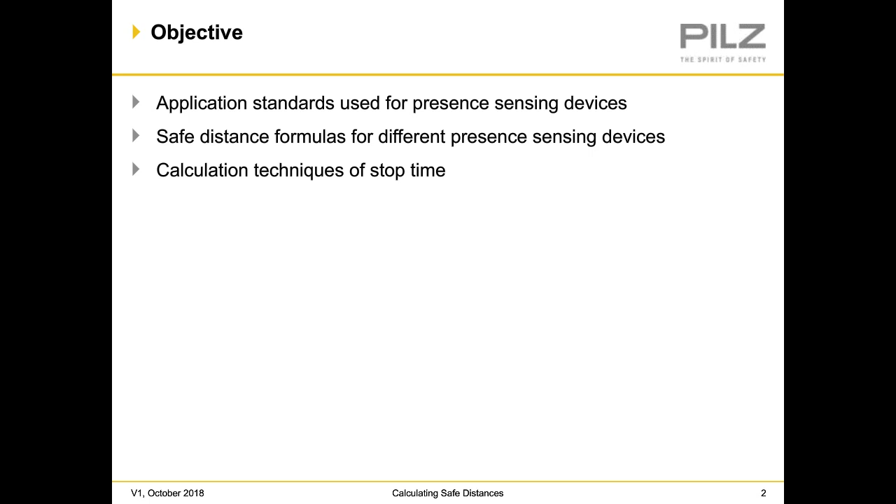The two main standards that we typically use for looking at stop time analysis are ANSI B11.19 or ISO 13855. Today we're going to primarily focus on 13855, and within 13855 you can use different types of technology such as light curtains, laser scanners, safety floor mats, two-hand controls, or even safe vision systems.

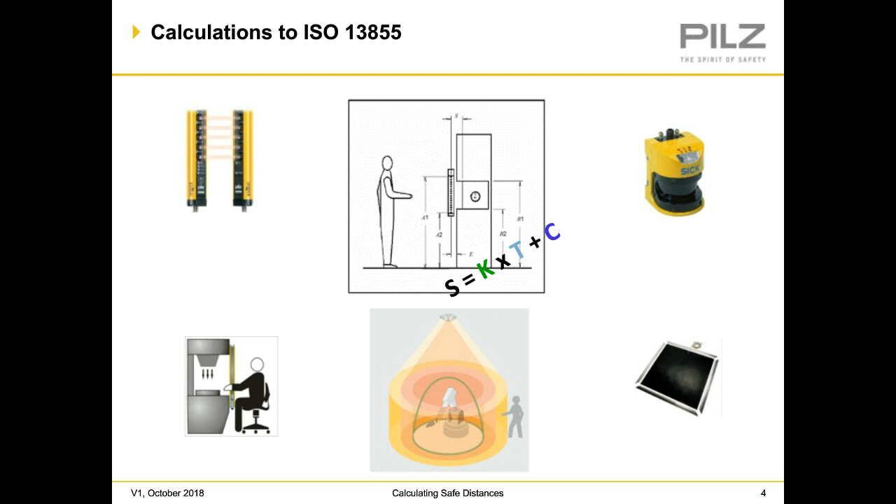A few of the applicable standards that we look at are 13855, positioning of safeguards with respect to the approach speeds of the human body. We also have 13857, safety distances to prevent danger zones being reached by upper and lower limbs. Those can also be applied. We have IEC TS 62046, application of protective equipment to detect the presence sensing of persons. It typically is used for the design of the presence sensing device. Then we also have ANSI B11.19, performance criteria for safeguarding.

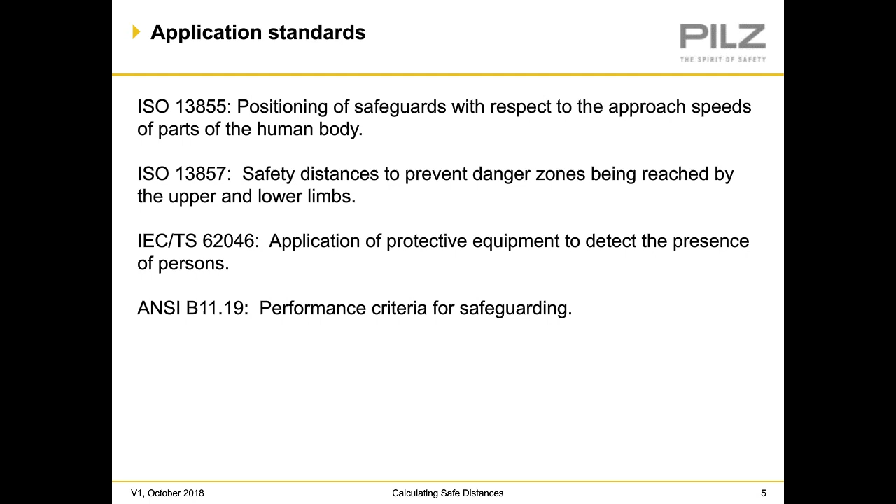Or you might even see AOPDDR, Active Optoelectronic Protective Device responsive to diffuse reflection. In other words, the reflection of light while being used in a laser scanner in 2 dimensions.

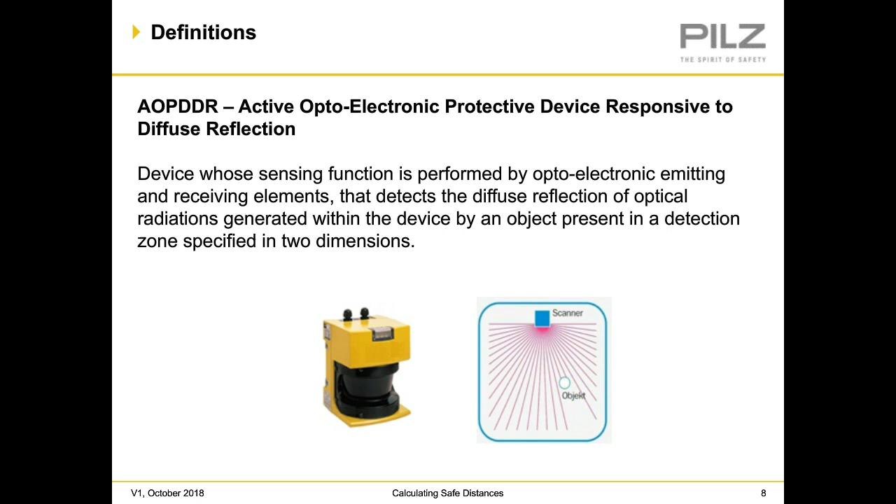Most of the light curtains and safety scanners nowadays do have what are called OSSD outputs, which are solid state. They are used with the machine control. They are typically transistors on the output, very similar to a normally closed contact, if you were to relate it to a dry contact.

When it comes to light curtains, we have different types of applications we can apply light curtains to. So here we have what's called blanking. With a specific type of light curtain that allows blanking, you can either have a fixed number of beams that are blanked in a specific location, or the blanking can also be floating, where you have maybe two beams that are blanked and it just floats up and down the light curtain throughout the application.

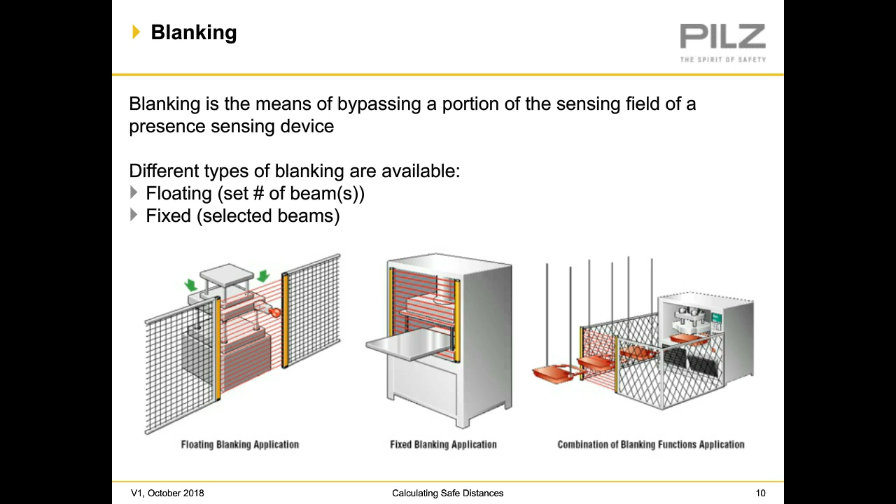We also have light curtains that allow for muting applications, for materials to flow in and out of work cells without having to disrupt the workflow through an interlock guard. In this case, the material is able to pass through the light curtain following a sequence of sensors that disable the light curtain to allow the material to pass through, but the safety function of the light curtain is still active.

So the typical application for this is either through an X pattern, as you can see in the top left, or if you look at the bottom right corner, there is a 4-sensor type setup that can also be used.

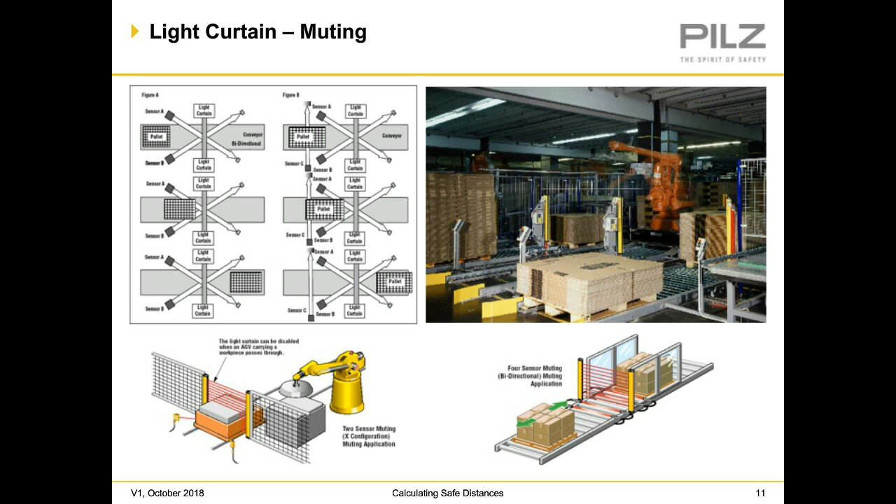There's also proper examples of light curtains or optoelectronic devices that can be used in safety applications. In this example, we see a standard light beam being used as a protective device to stop this roller. In this case, this is not an approved sensor to be used for a safety function.

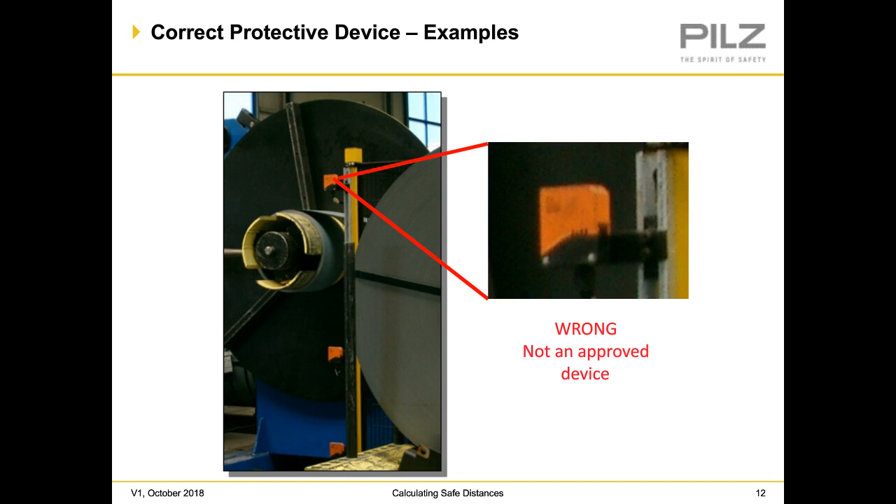We also have to deal with the proper installation of our safety-rated devices. We shouldn't have the ability to reach behind, around, over, or even crawl underneath it. So proper mounting is definitely required.

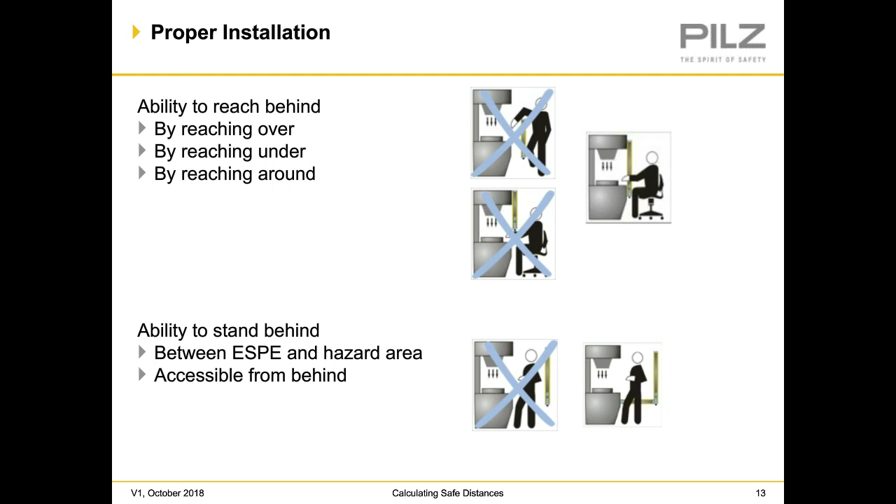So here we also have to worry about our proper installation as we were discussing. In this case, you may be able to reach around the light curtain into the cell, but we also need to maintain what we call a safe distance. So if the light curtain may be too close, we may have to move it away from the cell.

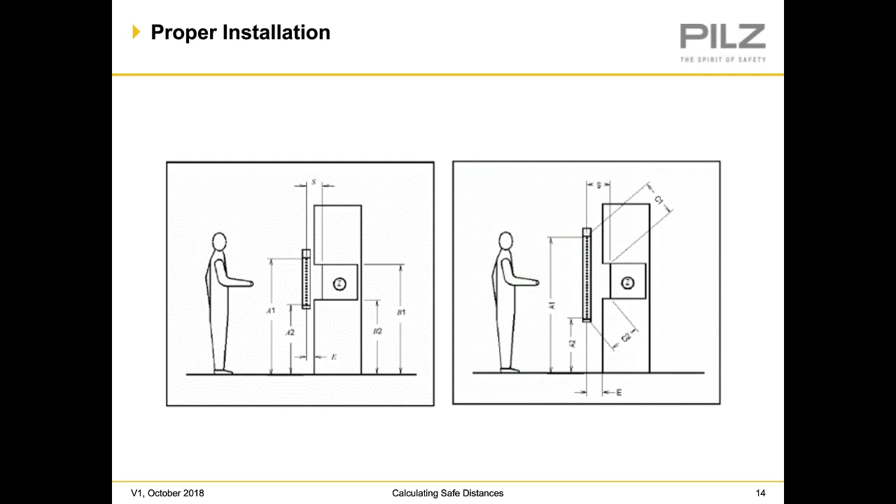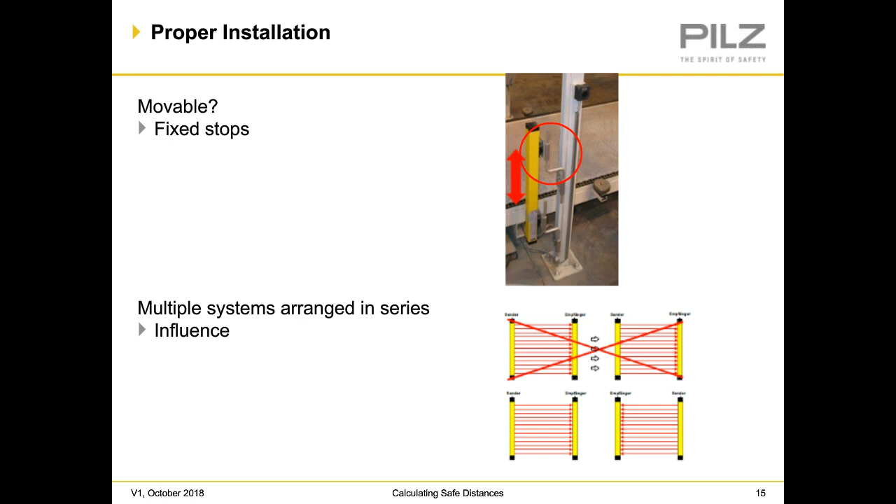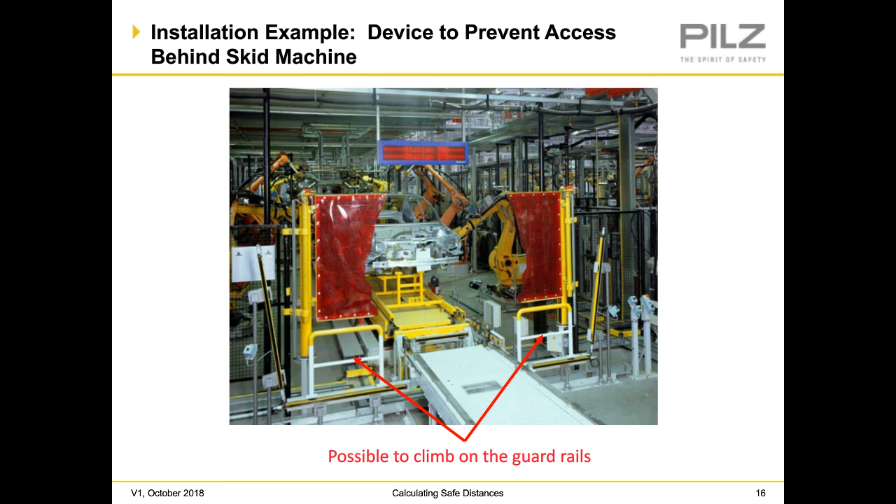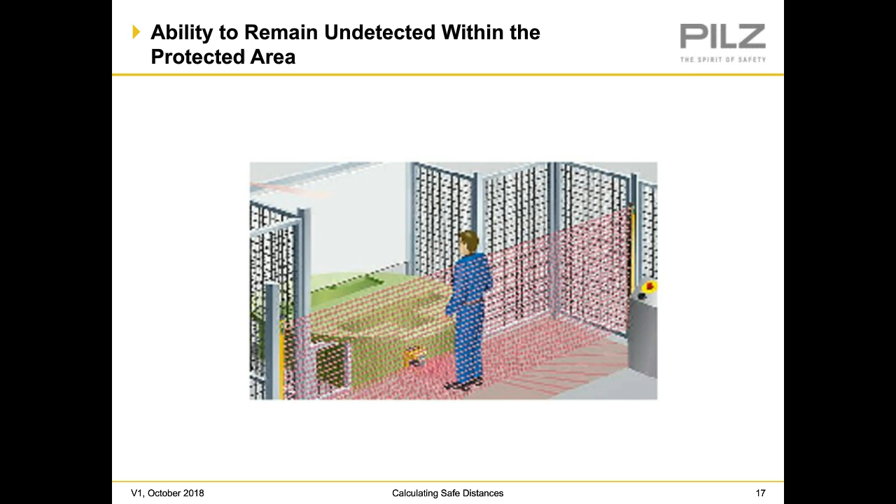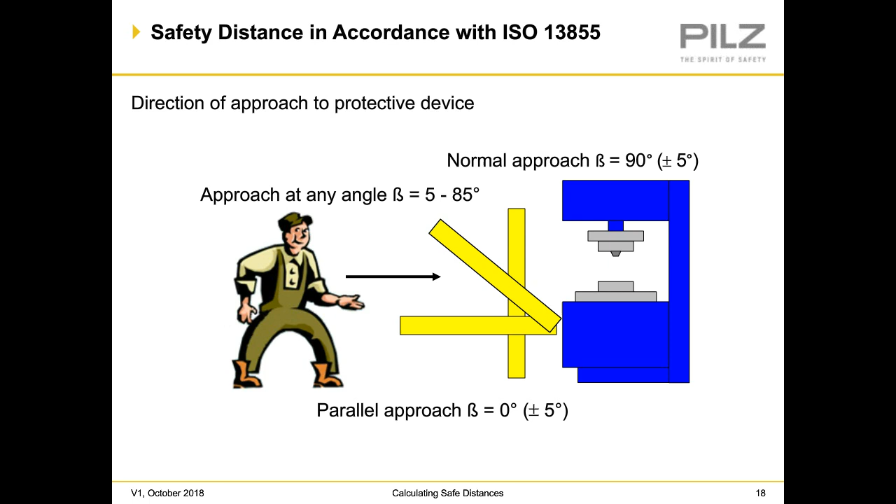Also referred to as the perpendicular approach. We have an angular approach, typically working from 5 to 85 degrees, and a parallel approach, parallel to the walking surface, where our beta is equal to 0. So depending on the angle and placement of the light curtain, this will determine the stop time and the safe distance for the application.

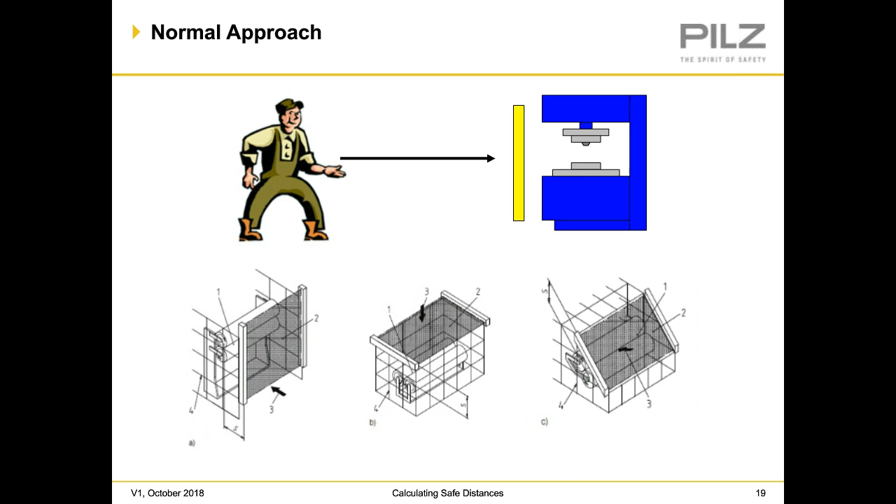So we have a basic formula that we use for any type of stop time calculation. The safe distance is the minimum distance we need from the point of hazard to the light curtain, which is equal to K times T plus C.

K is an approach speed. It'll always be a constant. T is going to be a combination of the overall stop time of the system, which includes the response time from the presence sensing device, response time of the control system, and the overall mechanical stop time of the device that's being stopped.

Then that is added to what we have as our C factor. This is an additional distance depending on the design and installation of the presence sensing device that you are using.

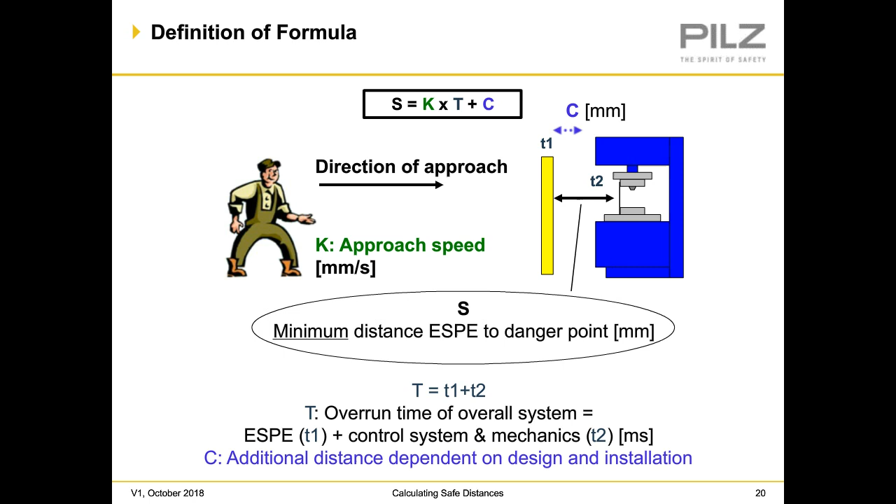So our approach speeds for K, according to 13855, we're going to use 2,000 millimeters per second if unhurried, reaching in with an upper arm or an upper limb. Our normal approach speed for walking is 1,600 millimeters per second.

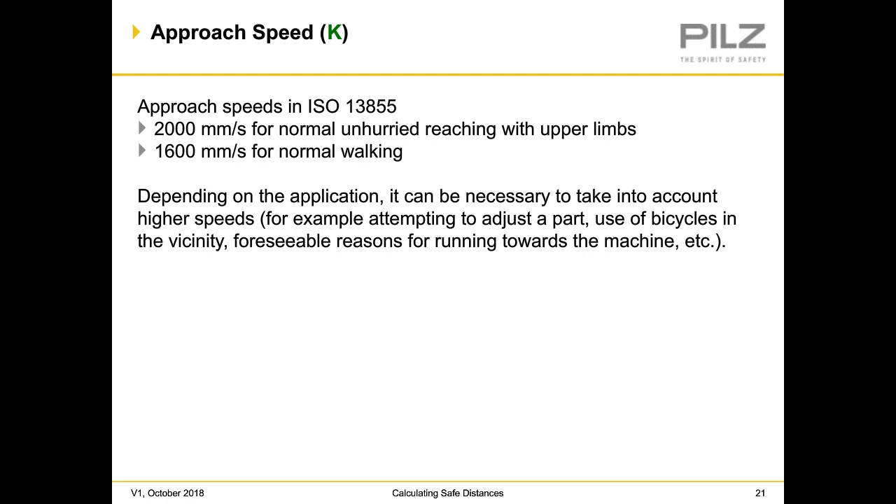The other thing that's going to be dictated is we're going to have to look at the resolution of our presence sensing device. The resolution is dictated by D. Here in this example, you can see some very common resolutions: 14 millimeters is finger detection, 30 millimeters is hand detection, and anything beyond 40 millimeters is body protection.

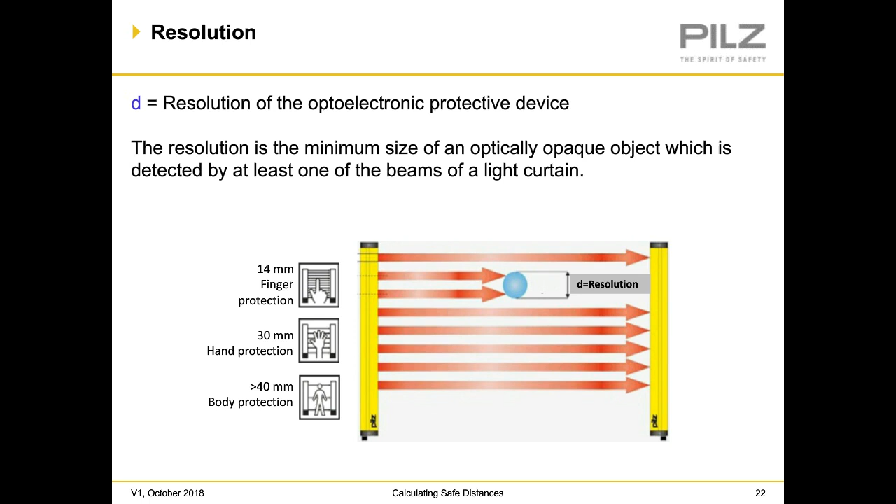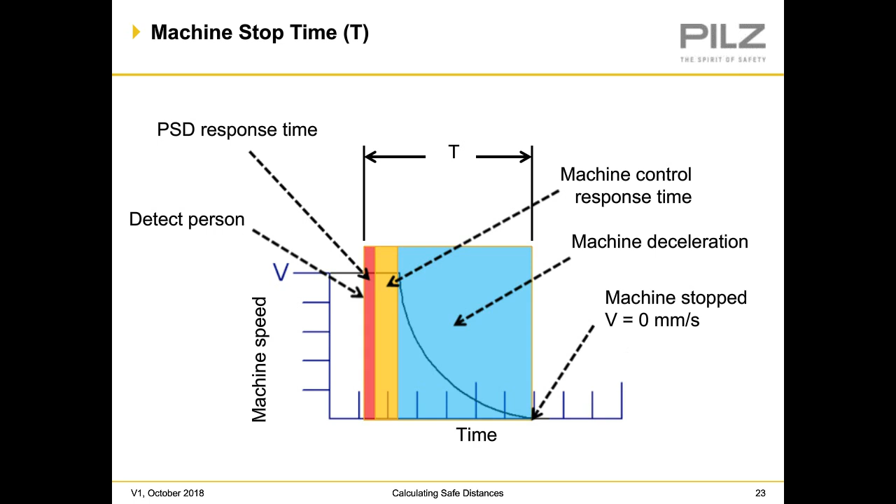So we can start looking at some of the different approaches. In this case, we're going to look at the approach speed and depth of penetration for the perpendicular approach, where the light curtain would be vertical.

According to 13855, if we look at the different resolutions, in this case a resolution less than or equal to 40 millimeters, the first calculation formula is S equals 2,000 times T plus 8 times D minus 14. This applies when you're standing anywhere from 100 millimeters to 500 millimeters away from the object. The 2,000 millimeters per second accounts for arm speed.

If we are greater than half a meter away, we can use 1,600 times T plus 8 times D minus 14.

If the resolution of the presence sensing device is between 40 and 70 millimeters, we use 1,600 T plus 850. In this case, our intrusion factor, the C factor, is an automatic 850 millimeter constant that is added. They also give us suggested mounting heights, where the lowest beam should be no lower than 300 millimeters, and the highest should be at least 900.

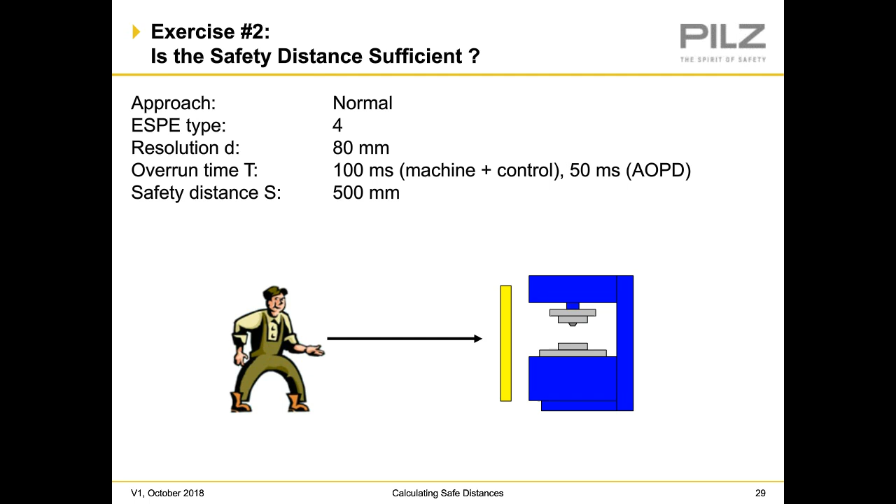In this case, with our resolution being larger than 70 millimeters, we can assume that it's a multi-beam system. So we're going to use the equation 1,600 times T plus 850. We have our 1,600 times the sum of 100 milliseconds and 50 milliseconds, added together, plus 850. So we have 240 plus 850, which equals a total of 1,090 millimeters. Our current safe distance is determined not to be sufficient.

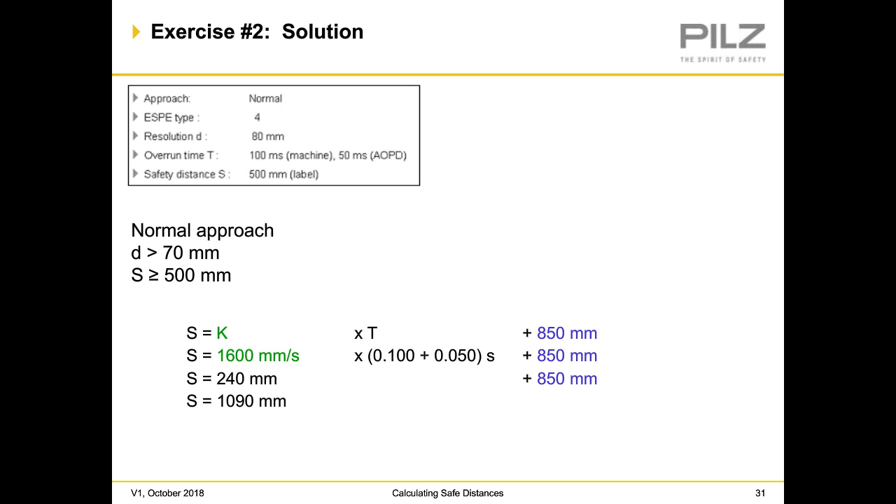So to resolve this issue, there are two ways you can do it. You can either move the current light curtain with the resolution of 80 millimeters back to the safe distance of 1,090 millimeters, or you can try to increase the resolution on a different light curtain to possibly have a safety distance that might be shorter.

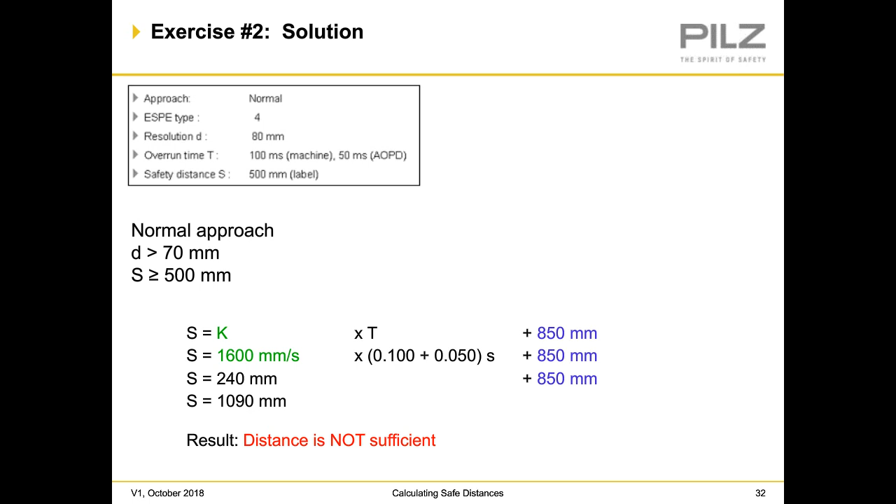Here we're going to look at the parallel approach for light curtains. Based off the safe time stop time formula, we're going to use 1,600 millimeters per second times our total stop time. But C, in this case, has changed to 1,200 millimeters minus 0.4, and H is the height of the protected field off the ground.

They recommend that a light curtain be no higher than 300 millimeters if you're going to use it on the horizontal plane for the parallel approach, because people can crawl underneath the light curtain at higher distances, possibly get closer to the hazard and reach up through the light curtain to the hazard. Also, when you have a light curtain at roughly 300 millimeters, it's more likely to hit somebody's shins and be detected. The higher you raise that light curtain off the ground, the less likely it's going to detect based off your step into it.

So let's say if you had it mounted roughly 800 millimeters to a meter, on an average male that's about waist height. So you could easily be nearly 1 meter stepped in before the light curtain even detects you. You'd be undetected underneath the light curtain.

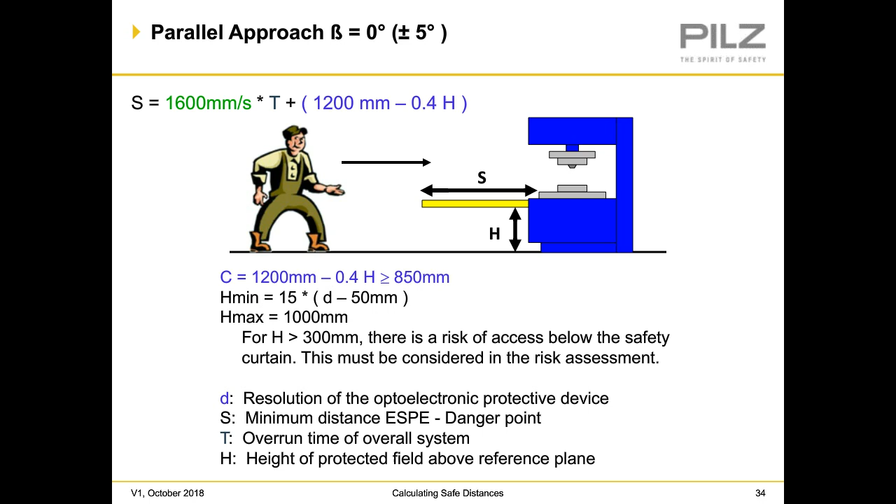So here we have a type 2 light curtain. Current height is 500 millimeters. We have a total stop time that was measured of 200 milliseconds. Our current safe distance is 1,000 millimeters. On a parallel approach or a horizontal light curtain, safe distance is taken from the furthest beam from the hazard. So that's where that 1,000 millimeters comes from. It is the furthest beam from the hazard.

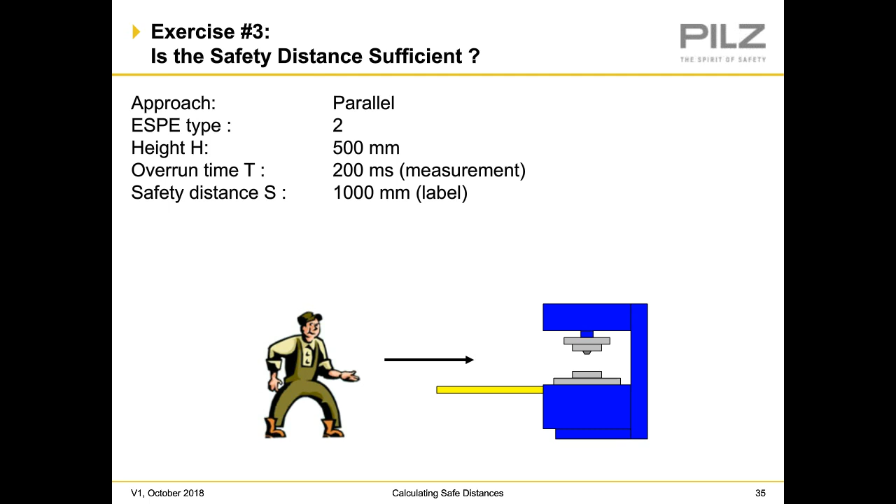Here we're going to have our 1,600 millimeters per second times our 200 milliseconds. In this case, we'll have 1,200 minus 0.4 times 500. So when we ultimately crunch our numbers, we'll get 320 plus 1,000. So our total safe distance will be 1,320 millimeters. Our current safe distance is not sufficient.

Yet again, we can either get a longer light curtain, that is 1,320 millimeters, or you might be able to go for a tighter resolution, or lower the light curtain to where it could possibly detect you earlier.

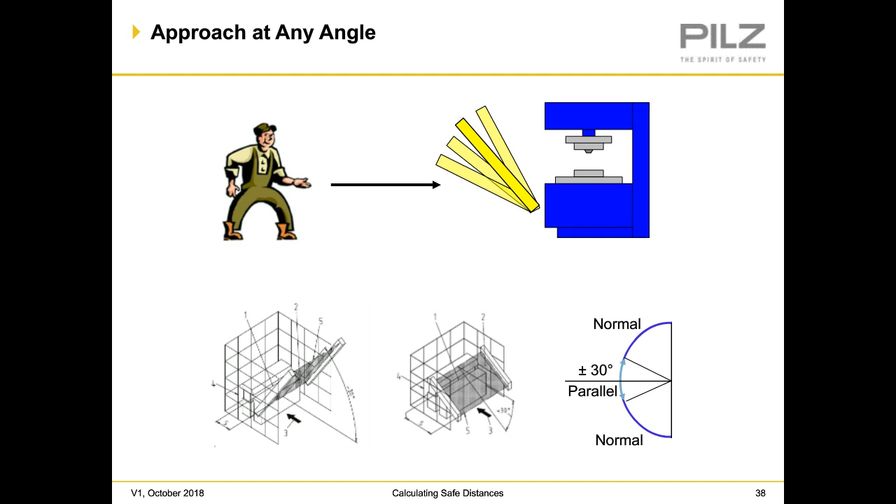We also have our angular approaches. Depending on the angle of the light curtain will depend on the approach technique that you use. If you are plus or minus 30 degrees from the parallel or the horizontal light curtain, you use the parallel equations. If you are plus or minus 30 degrees from the normal approach or the vertical light curtain, you use vertical light curtain equations.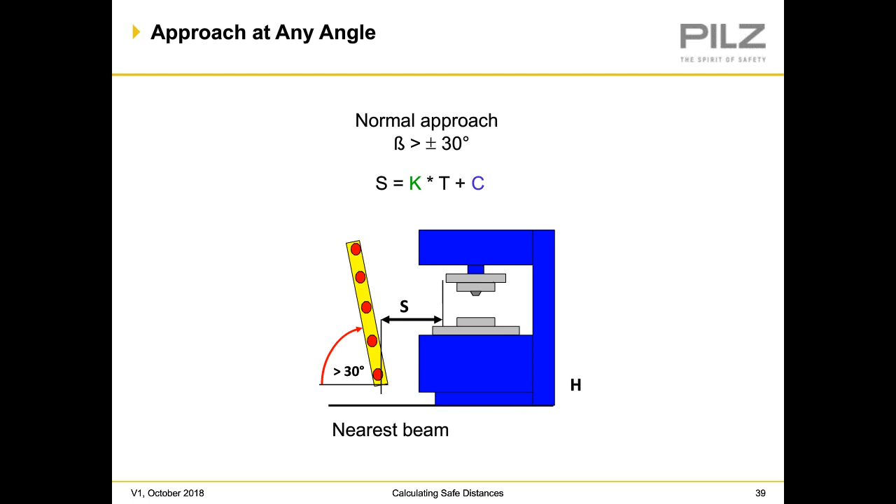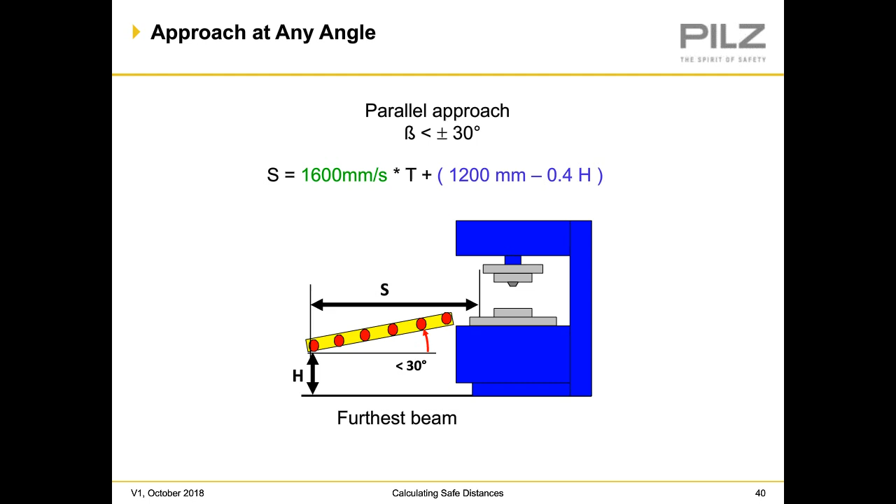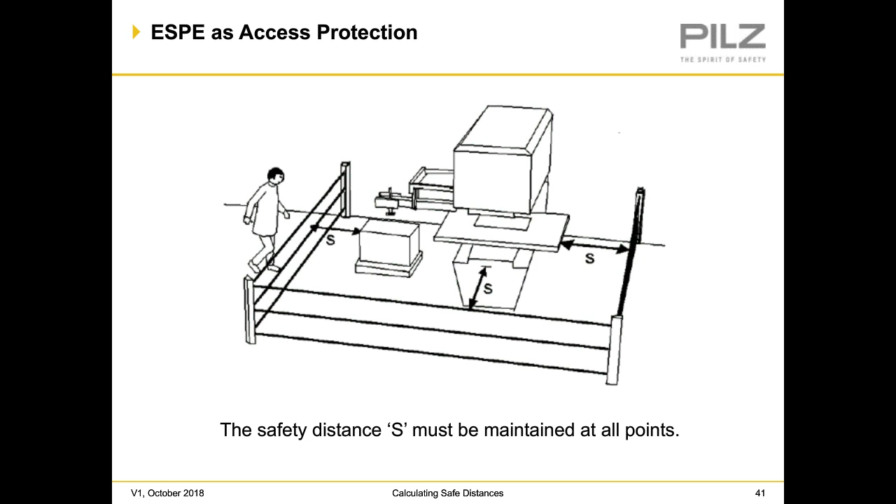So we have to maintain our safe distance all the way around the machine, just like we see in this example. So depending on where the hazards are, and the stop time, and the associated hazards within a cell—in this case we have a light curtain all the way around—the S may be different on one side than the other depending on the closest hazard. But we still need to be able to maintain our safe distance for all hazards inside of a cell.

So here, one thing we can start doing is maintain our safe distance. But in this case, we're going to look at the height of the light curtain also. Just like a guard, you can possibly reach over a guard into a hazard. The same thing can happen with a light curtain.

So here we have a type 4 light curtain. The height of the top beam of the light curtain is at 1,000 millimeters. Our resolution is 14. Our stop time measurement was 125 milliseconds. Our current safe distance is 1,000 millimeters.

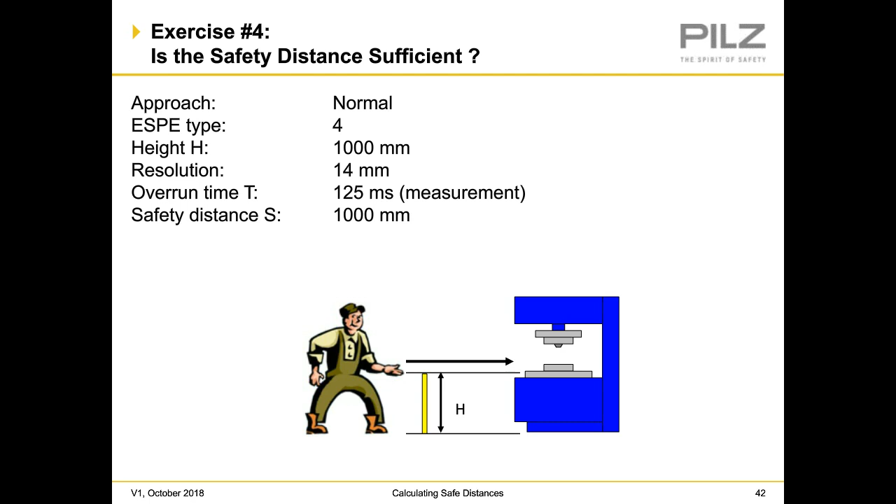Here, our resolution is less than 40 millimeters, so we're going to use 14 minus D. It should be 8 times 14 minus D. And what happens here is we have our 14 minus 14 is a 0, so ultimately we are going to have 1,600 times 0.125 seconds for 200. But here, we use 1,600 in our initial calculation. Since our S ended up being less than 500, we must now go over to the 500 millimeter calculation.

Is our distance sufficient? Well, in this case, we have 200 millimeters. But there might be also a possibility that we could reach over the light curtain.

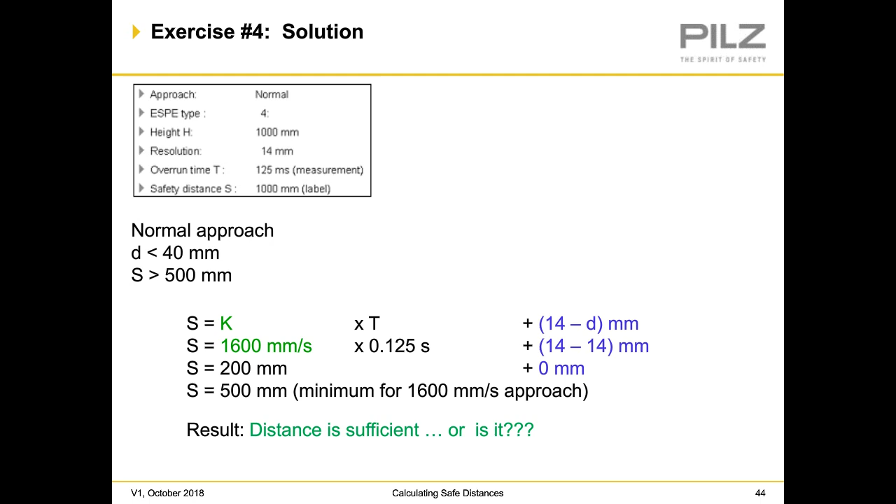Here we look to the dimensions. This table looks very similar to what you might find in 13857 for reach over of a guard. But here we're trying to reach over the top beam of a light curtain. So here we have A, which is the height of the hazard, or B, which is the height of the top detection zone, so the height of the top beam of the light curtain. And then what we have is another factor, what we're going to call CRO.

The additional distance a body part can be moved towards the hazard before actuating the safeguard. What we're going to end up doing is, depending on the height of the presence sensing device and the height of the hazard, if I'm able to reach over the presence sensing device, we may have to add an additional distance to where I can't reach over the presence sensing device to the hazard. So that's what our CRO is. And then yet, our S is still our minimum distance.

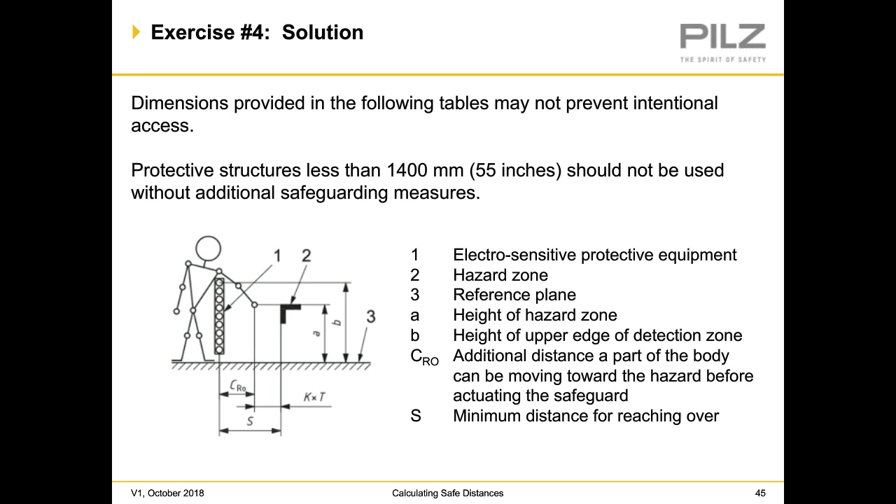Here, there's a table very similar to 13857. In this case, it's 13855. So here we have the height of the upper edge of the light curtain, which was 1,000 millimeters, so we select that. And then the current safe distance. Height of the hazard is 1,000 millimeters, and the height of the upper edge is also 1,000 millimeters. To find out where those two cross, our CRO comes out to 1,150 millimeters.

So from here, what we end up doing is we take our S, which our stop time calculation was 200 millimeters, and we add the 1,150 from the reach over of the light curtain. So our total safe distance is 1,350. Our current safe distance of 1,000 millimeters is not sufficient.

So to remediate this, you could easily install a taller light curtain, or you move the light curtain further away. That way you cannot reach over.

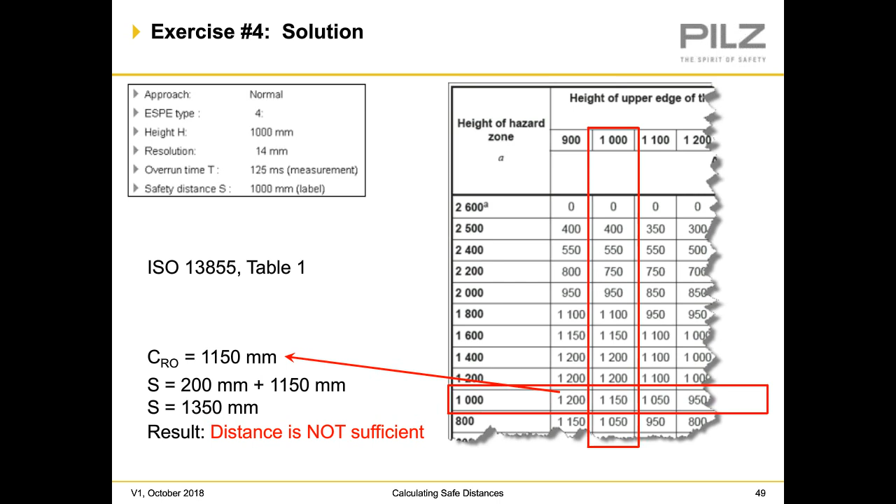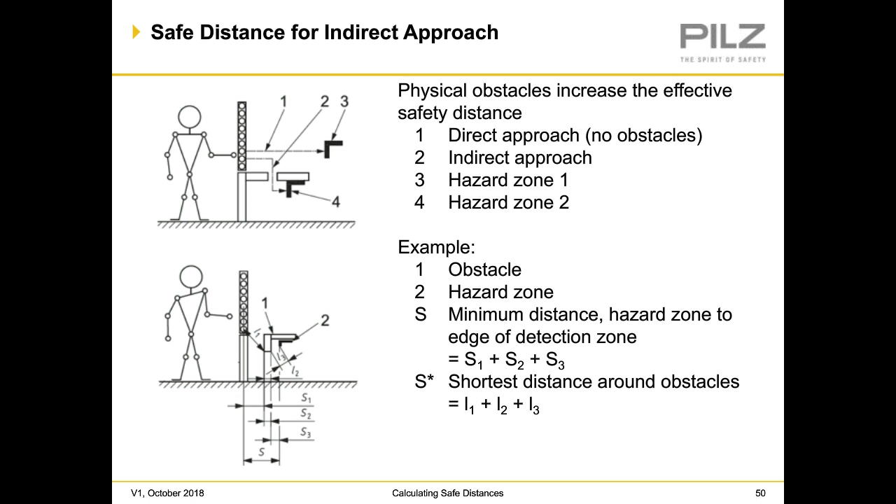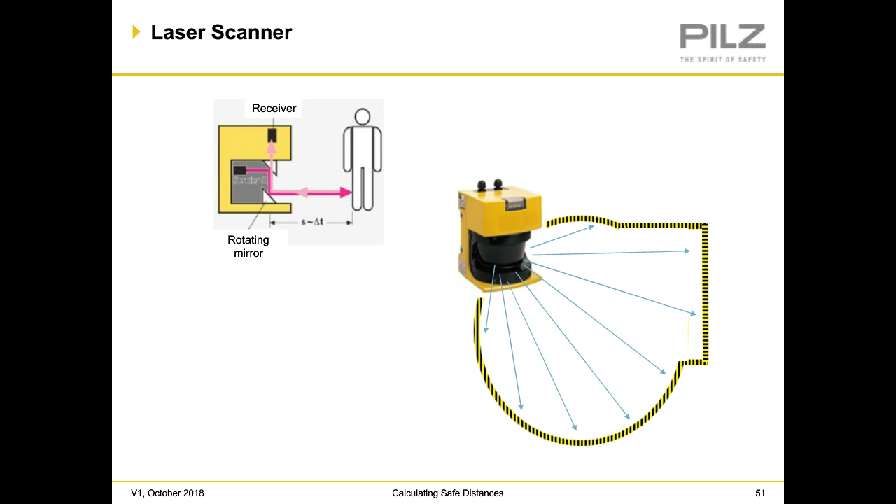Next, we can start looking at laser scanners, which operate on a time of flight theory. A beam of light is pulsed out from the receiver, and it looks for similarities within the scans. If it finds a dissimilarity between the programmed scanning area, it will trip the outputs. So here, typically what we like to see in a laser scanner application is at least the floor painted or outlined based off the projection field on where the scanning area is. It's a very good engineering best practice.

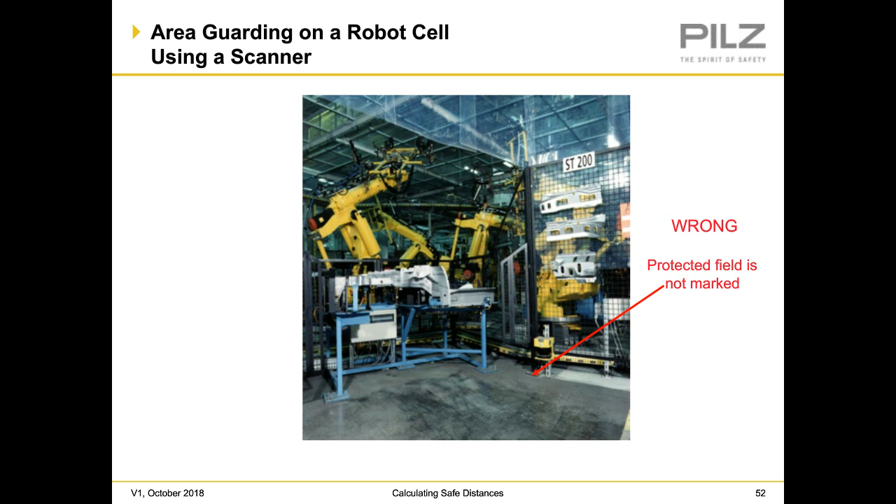We also see laser scanners on automated guided vehicles, AGVs, as they're referred to.

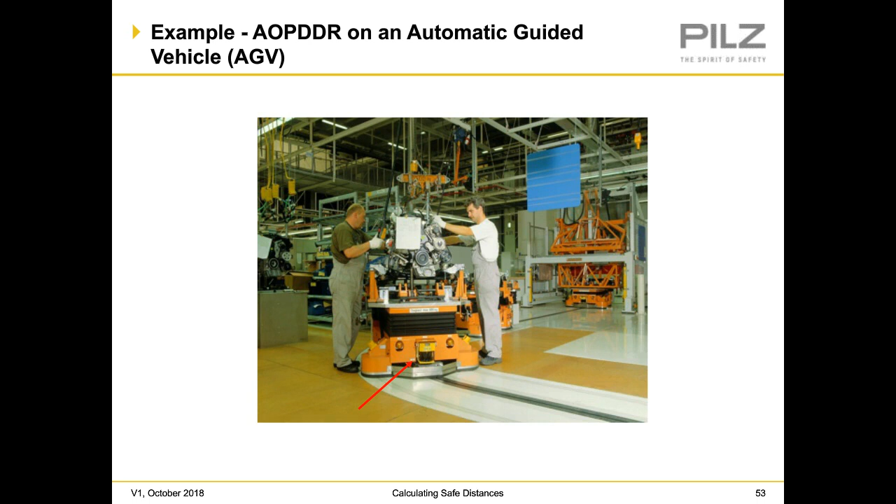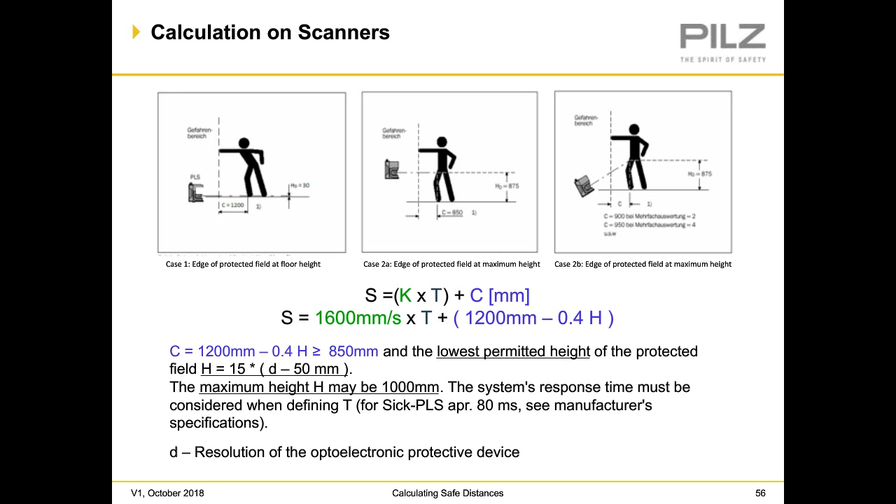Here we have an example of a laser scanner. The resolution of the scan is 70 millimeters. The height of the scanner is 30 millimeters off the ground. The stop time of the machine is 100 milliseconds, and the response time of the scanner is 80 milliseconds. Our current safe distance is 1000 millimeters.

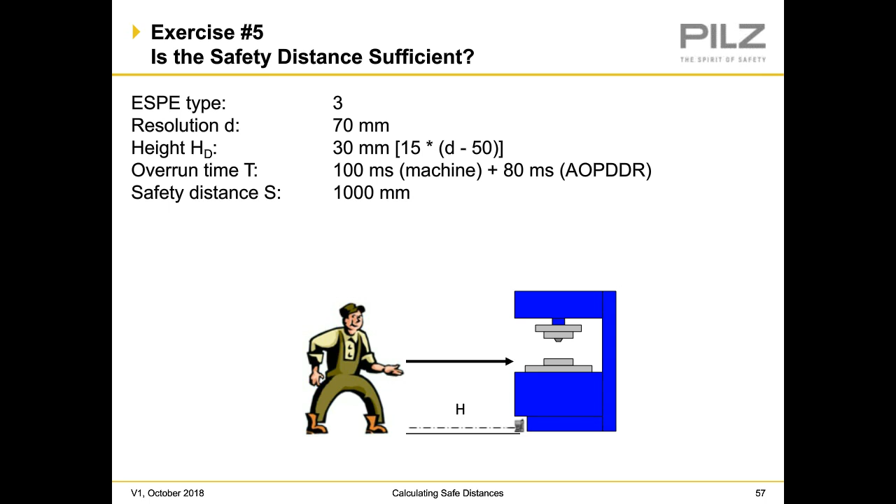Here we can do our equation. We have 1,600 millimeters times 1,200 minus 0.4h, 1,600 times 180 milliseconds. Current height is 30 millimeters. We get a total of 1,476 millimeters. Based off our current safe distance of 1,000 millimeters, our safe distance is not sufficient.

In this case, you may have to either get a different laser scanner that can have a tighter resolution, such as something that may scan at 50 millimeters or even 40, or you're going to have to increase the safe scan distance on the laser scanner.

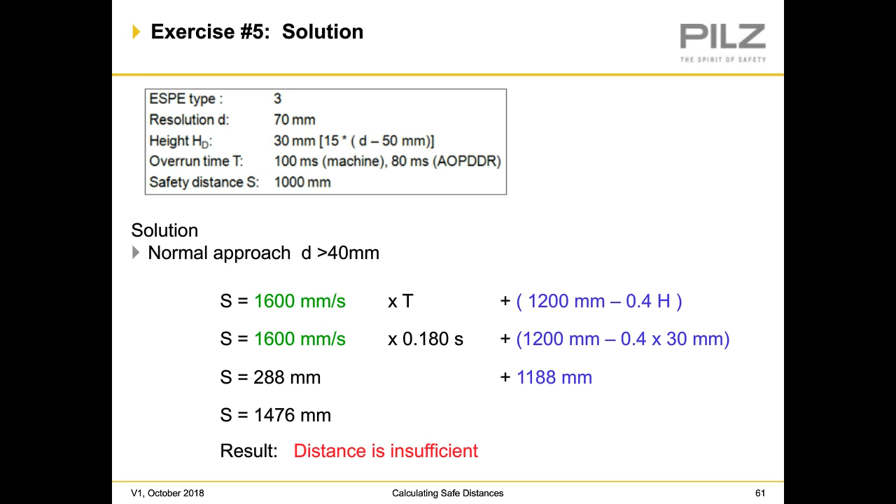OSHA's calculation is very similar to ISO 13855, but here they use a constant of 63 inches per second, along with TF, the total stop time of the overall system, and DS, which is the distance between the light curtain or scanner and the danger point.

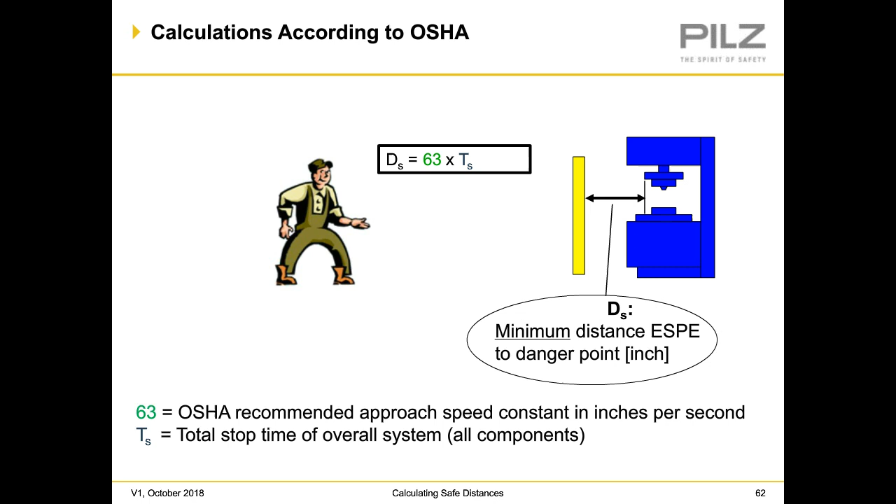ANSI also has its own equation, where DS is the safe distance, K is our constant of 63 inches per second or 1600 millimeters per second. Here they use a couple of different T factors: TS, the stop time of the machine; TC, the response time of the control circuit to activate machine stoppage; TR, the light curtain response time; and TBM, the additional stopping time attributed to the response time of a brake monitor. Something like a press may have a TBM.

Instead of a C factor, ANSI uses DPF, the depth of penetration factor, which here is 3.4 times the resolution, defined as OS minus 0.275. This is all done in inches, whereas 13855 uses millimeters.

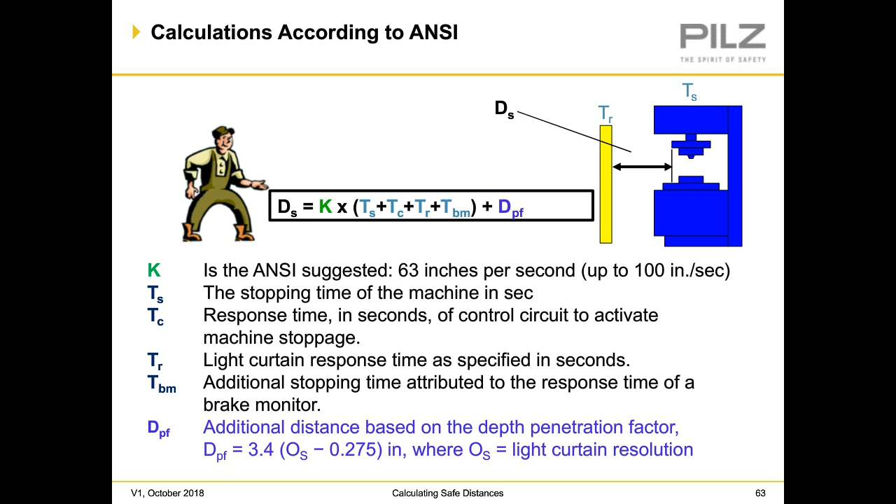We have different ways to verify and validate our systems. It's two-part: an evaluation of the installation for compliance with installation requirements, basically ensuring the presence sensing device may not be easily circumvented, and a confirmation of the safe distance, where through an actual measure of stop time we calculate the required safe distance and compare it to the actual.

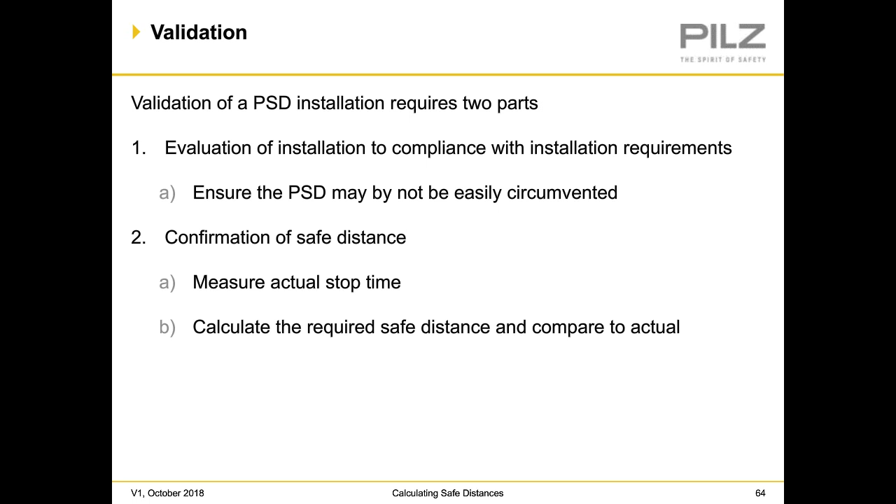So how do we actually verify our safe distance? There are different types of encoders you can purchase and use. Here are two examples. ASM has the NMG2, a stop time measuring tool, basically a string encoder. You place the string on the end of a robot, for example, then break the light curtain, and based on the light curtain breaking, you can measure the safe distance based on how far the string encoder falls out. There's also the micro STM, another string type of encoder. Those are available for purchase on the market.

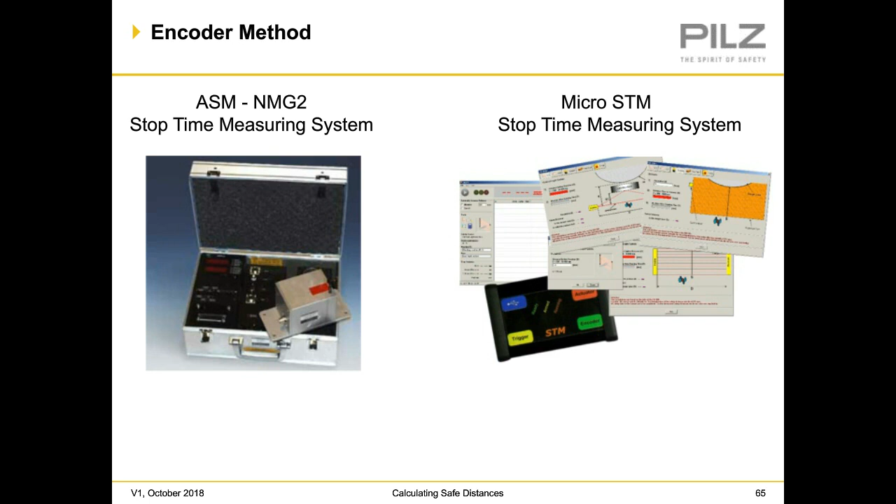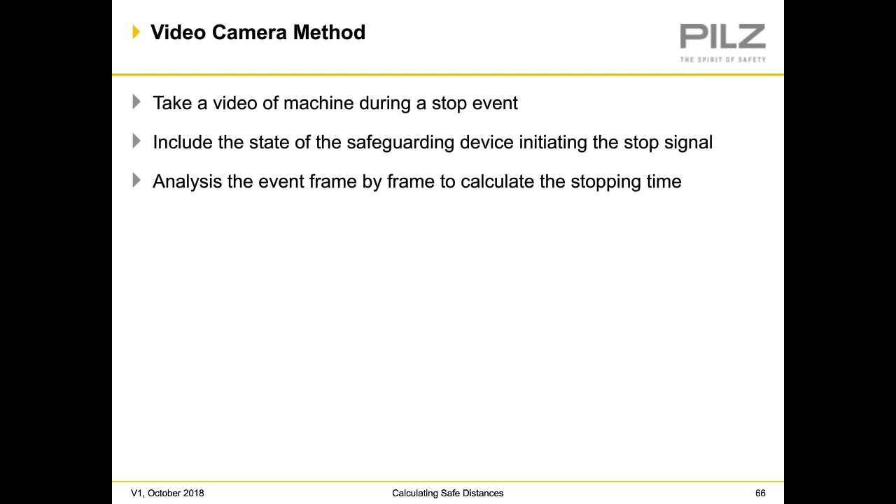One of the other popular methods commonly used is the video camera method. Here we take a video of the stopping event, including the state of the safeguard and the initiating stop signal. We do some kind of analysis where we count frame by frame for the total stop time. Your average digital camera shoots at about 30 frames per second, though plenty of others shoot at 60 or even 120. Here we'll shoot at 30 frames per second, which is equivalent to 33.3 milliseconds.

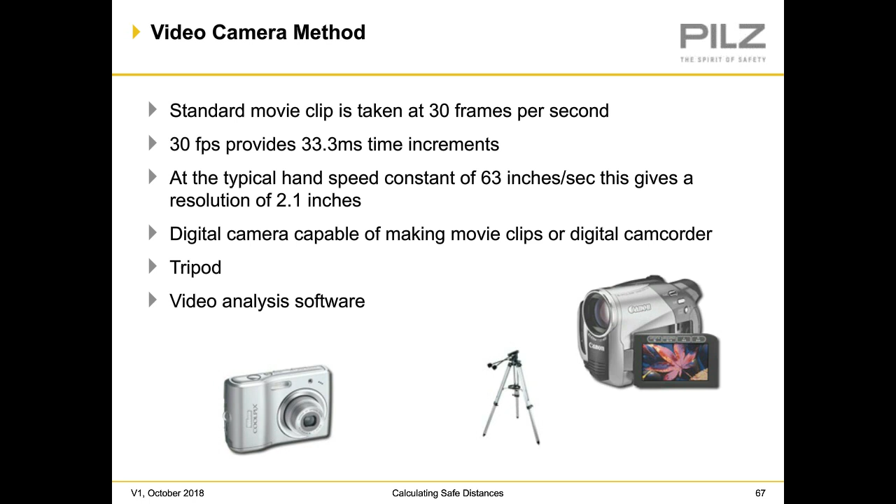We typically use a tripod to maintain steady, consistent videos, along with some kind of video analysis software. We need to determine the hazardous location, measure the safe distance, and determine the critical motions at high speed. If you're using a robot cell, the robot needs to be moving at full speed under full load, including the end-of-arm tooling with the part inside it. You need to capture the presence sensing device and the robot stopping in the same frame. We analyze frame by frame, determine our depth of penetration, calculate the safe distance, and compare it to the actual safe distance we have.

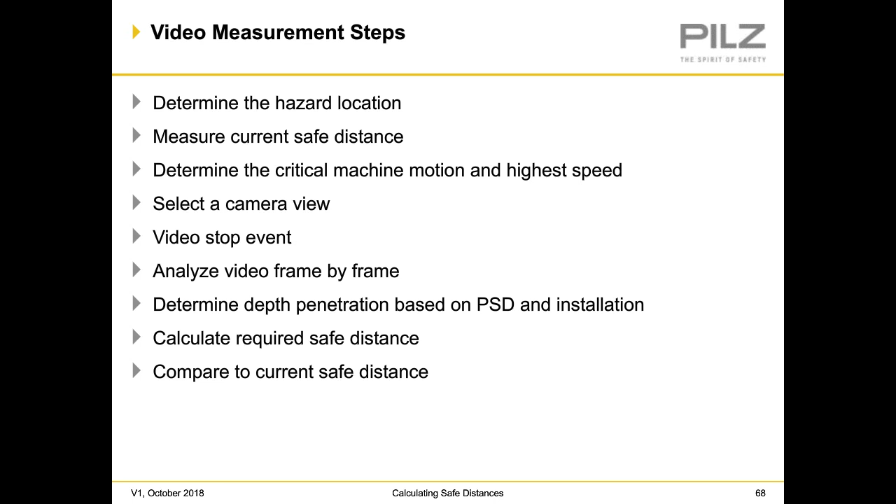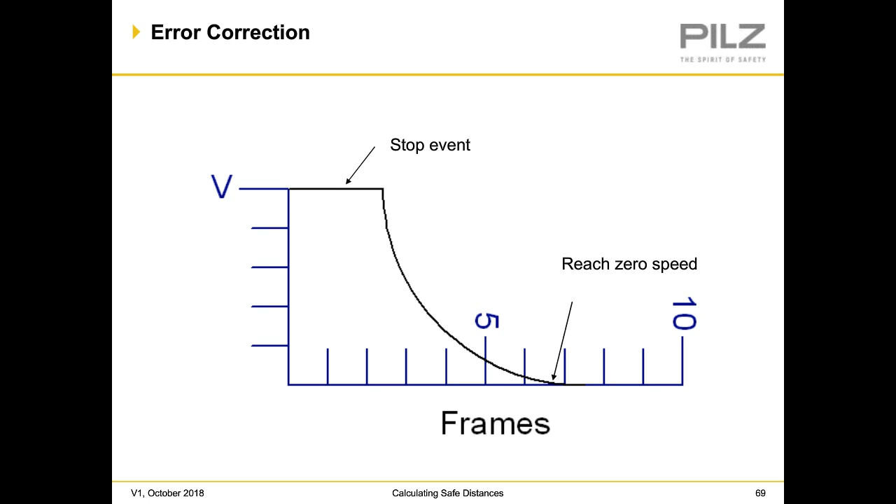What we do is, when we have the stop event, we look for the LEDs on the light curtain to change state, which typically happens between frames 0 and 1 — that's where we start counting our first frame. The zero speed happens between frames 6 and 7, so here we count that as frame 7. So where we first see motion, or where the LED on the light curtain changes state, that's our first frame, and the last frame where we see motion is our last frame.

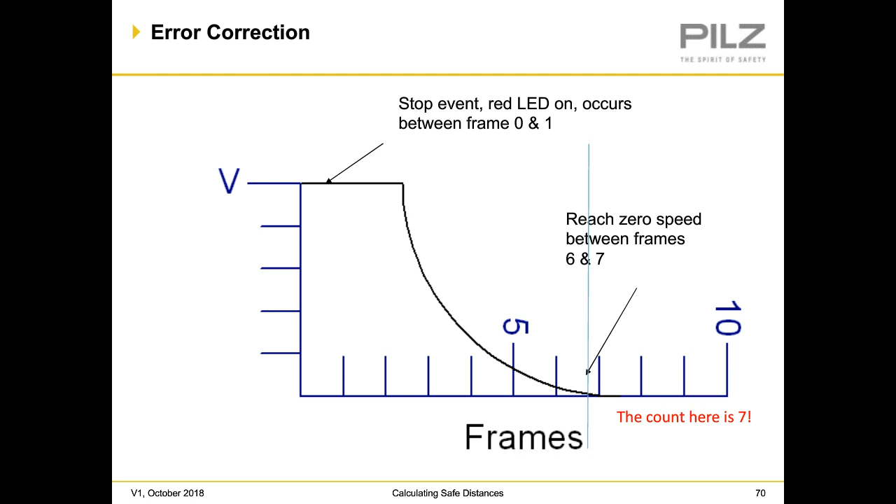So here, the red LED was first noticed on frame 1, therefore the stop event happened between frames 0 and 1. The machine shows no relative motion between frames 7 and 8, therefore zero speed was reached between frames 6 and 7. The presence sensing device comes on after the presence sensing device response time, therefore that response time must be added to the stop time measurement.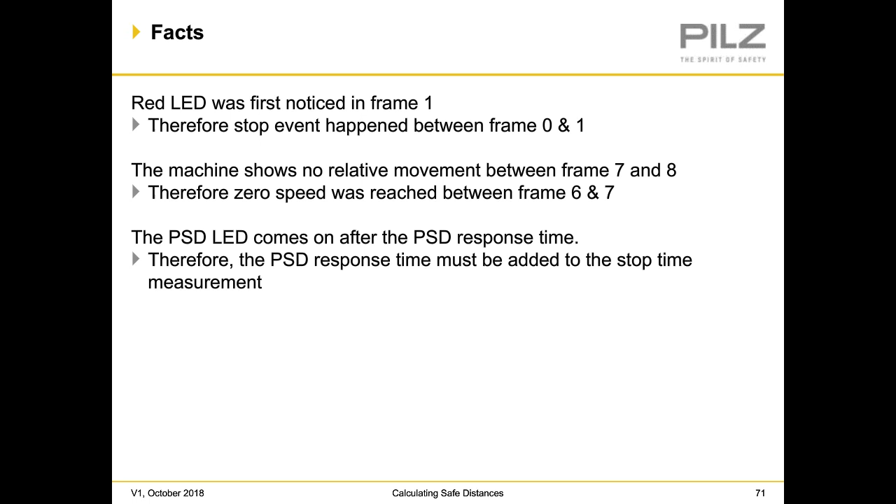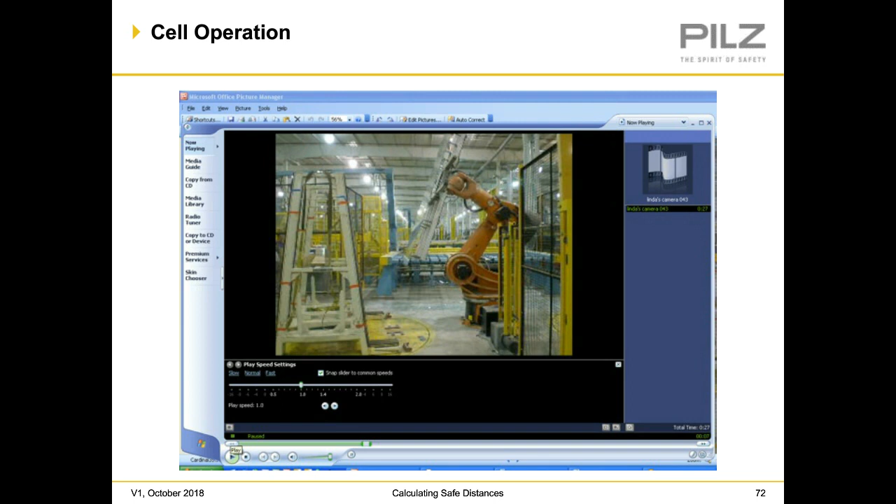Here we have our analysis software. There are several different programs out there that can do it. In this case, they're using Windows Media Player. I often use VLC Media Player.

Here what we do is we set up the video to be able to see the light curtain. We break the light curtain to see our hazardous motion. That way we can see the dangerous motion frame by frame until it shows no more movement.

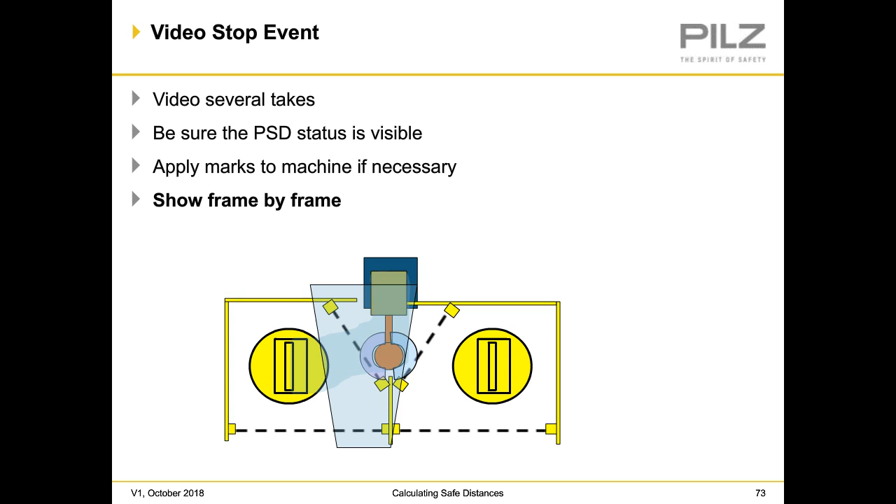Now what we also want to do is repeat the test to make sure we get consistent results. So on average, I typically will do a test 3 or 4 times to make sure I have consistent, repeatable results. If the results aren't repeatable, you may have external factors affecting your stop time. It may require additional analysis on the machine.

But in this case, I did my test 4 times where I had stop times of 19, 20, 20, and 21 frames. What I'm going to do is average those together. My average is 20 frames. So the initial frame stop I will have is 20. If I convert that 20 frames over 1 second for 30 frames, I get a stop time of 0.67 seconds for the response of the control system and the machine stopping.

But I also have to add in the response time of my presence sensing device. In this case, the light curtain had a response time of 20 milliseconds. So I add those two together, and I get 0.69 seconds.

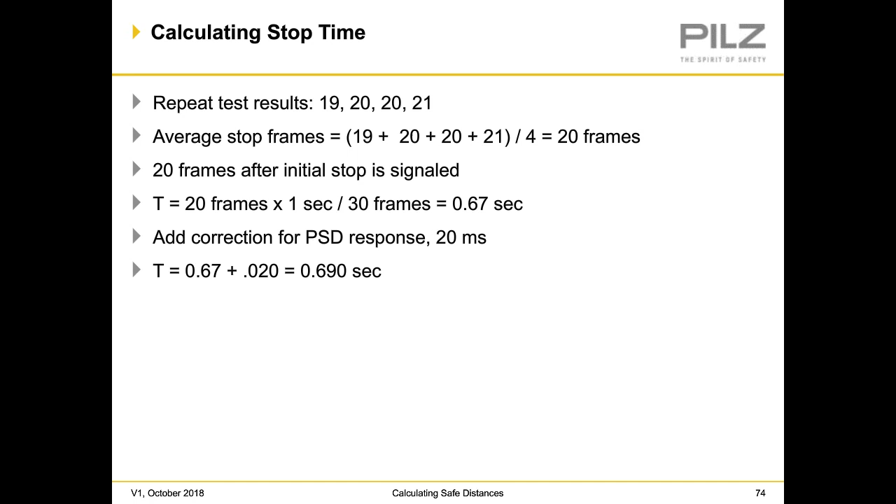So here, for my light curtain, I'm going to use a calculation where my K is 2,000 millimeters. My C is 8 times D minus 14. My stop time is 0.690 seconds with a resolution of 40 millimeters.

So if I crunch my numbers, I get 1,588 millimeters. That puts me beyond my 500 millimeter requirement, so I can use 1,600 millimeters to crunch the numbers. Once I do that, my total stop time and safe distance is 1,312 millimeters.

The reason why we went from the 2,000 to 1,600 is because I am beyond that 500 millimeter mark. So I am only required to use 1,600 millimeters, which shortens the distance up by over 200 millimeters.

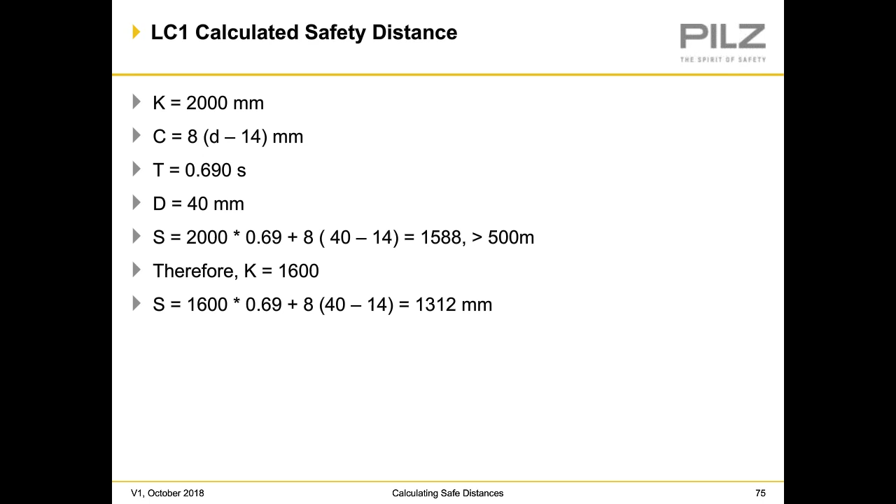From here, I'm going to kick it back over to Stephanie.